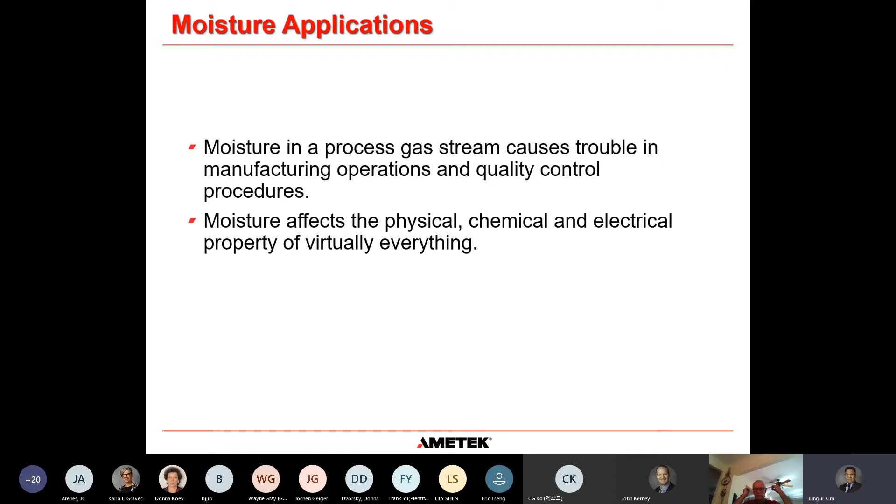Why measure moisture? Moisture in a process gas stream causes trouble in manufacturing operations and quality control procedures. Moisture affects the physical, chemical, and electrical properties of virtually everything. If it goes undetected, moisture can affect product quality and lead to process downtime.

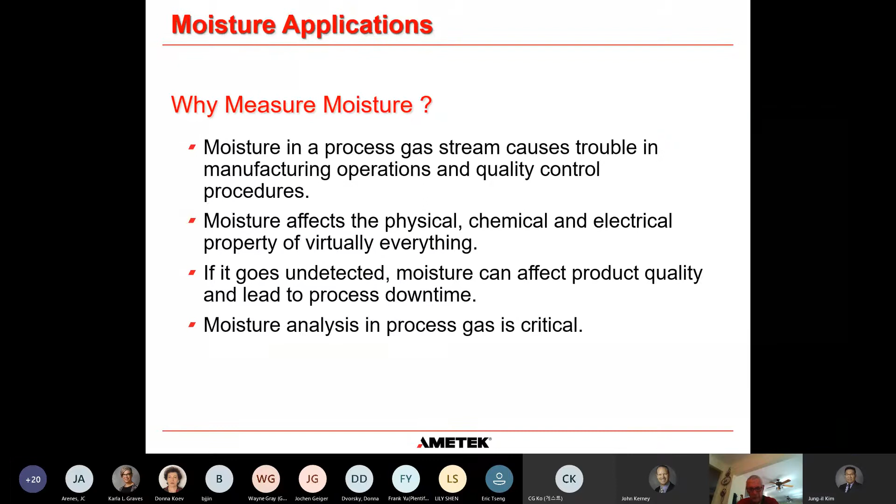Moisture analysis in process gas is critical. Maintaining an optimum level of moisture is critical because it minimizes pipeline equipment corrosion, minimizes line freezing, improves process yields, improves product quality, lowers plant operating costs, and can also slow down catalyst degradation.

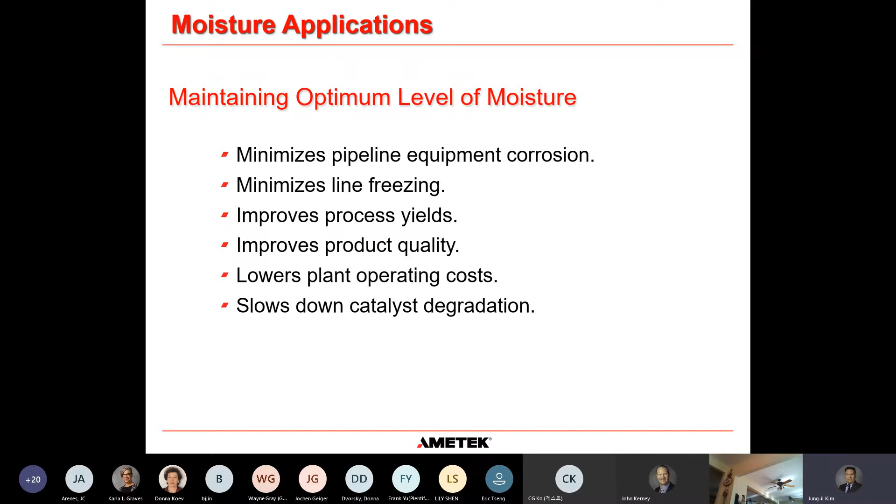I wasn't sure whether I should go over a little bit about the principles of QCM, because a lot of you are very familiar with it. What's the consensus? Joe, I would cover it just since we're recording the session. Might as well cover it.

QCM technology basically measures the frequency of the quartz crystal when we have sample gas, which is wet gas, and dry gas, sample gas that is actually dried by the reference dryer. We have two crystals: the measuring crystal and the reference crystal. Both crystals actually beat at 9 megahertz, and you'll notice that the reference crystal is at 9 megahertz, whereas the measuring crystal is slightly lower.

This is because the measuring crystal is coated with a polymer, a hygroscopic material that absorbs moisture and changes the frequency. So, as I said earlier, the principle is measuring the difference between dry gas and wet gas.

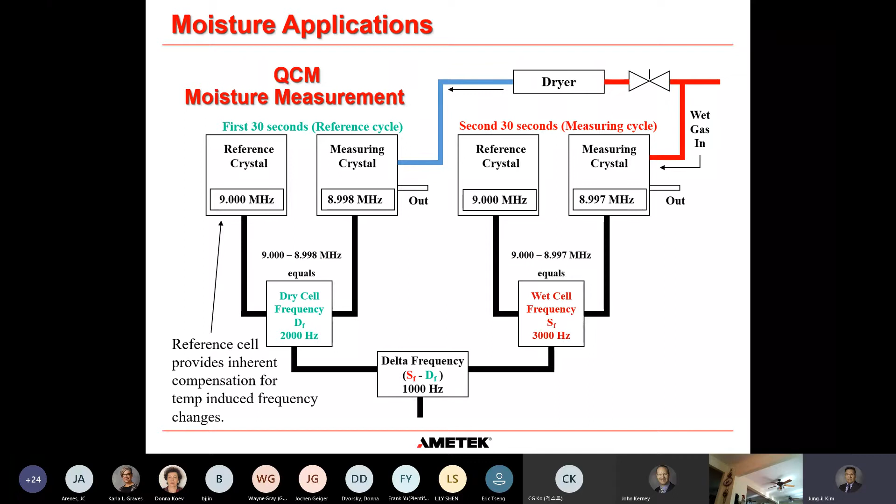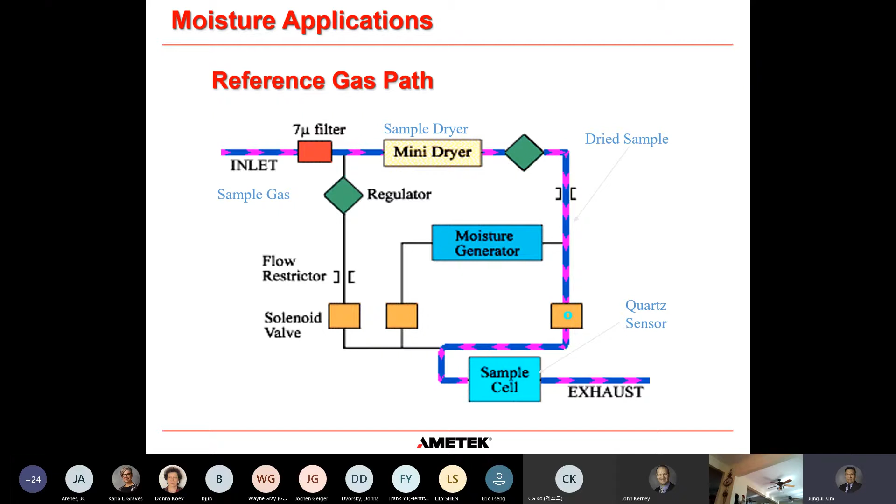The QCM has 3 paths. As I said earlier, the sample path, where the sample gas goes to the sample cell, and the reference gas path, where the reference gas goes through the dryer that gets dried down and goes to the sample cell, where you're measuring the difference between the dry gas and wet gas.

QCM has a 3rd path, which is the moisture generator path, where we have a NIST traceable calibrated moisture generator. When you are running verification on it, you are measuring the wet gas, which is the gas going through the moisture generator, and the dry gas solely going through the dryer only. And that gives you the value of the moisture generator.

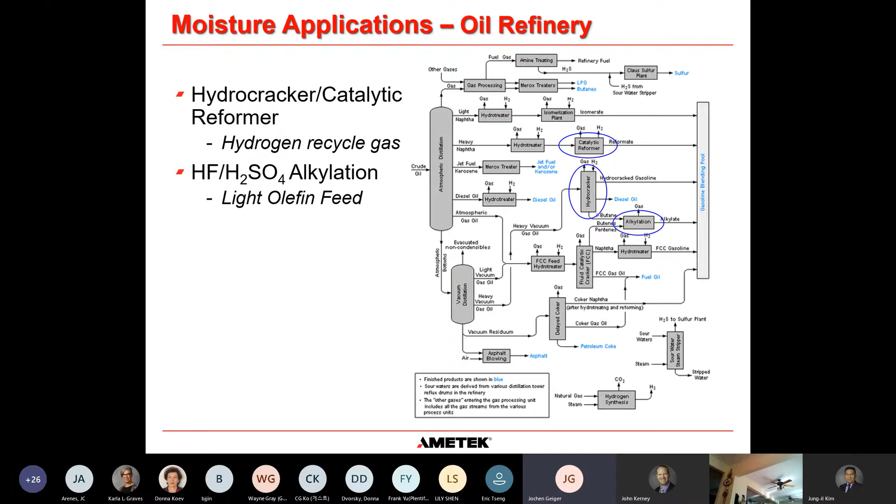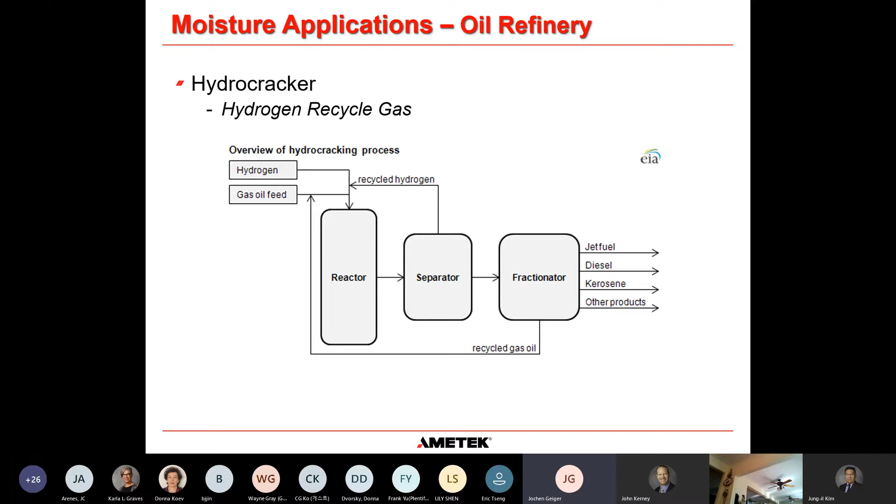Next slide please, Daniel. So the overall description of the application is hydrogen recycle gas. I've not come across a single refinery in my business lifetime which does not have a moisture analyzer for this application. They all have a moisture analyzer for this application.

Go next slide, please. So what is the process doing? The process is increasing the octane number of the product, and hydrogen is a byproduct of that. Hydrogen is used to activate the catalyst and to have the catalyst working, but it's highly critical that there is a known specific moisture concentration in that hydrogen.

Sorry, can you go back to the previous slide, Daniel? What is also happening during the reforming - at one point the reformer needs to be recycled. There are several reformers always in a refinery, and one may be on a recycle. During that recycle of the reformer, there will be products in the gas like HCl, like pure chlorine, some other dirt, which can really potentially damage any kind of instrument installed. Therefore, most people isolate their instrument during the recycle of the catalytic reformer and only get back at the point when the unit becomes active again.

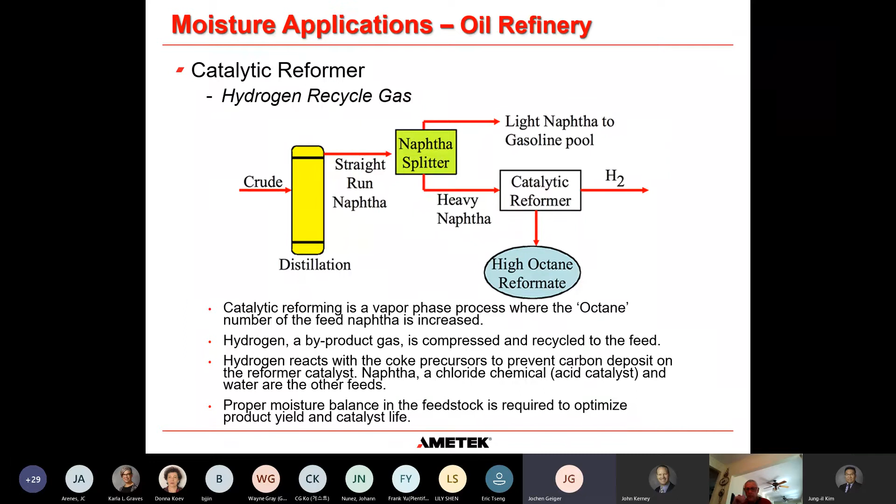So what I'm doing when I'm visiting customers - go next slide please again, Jung-il. For this application, when you see a customer, as I say, there is no refinery without having that measurement installed. I can almost guarantee that. Something they have. The question is, what does the customer have, and how happy is the customer with what he has installed?

For example, if you come across and he is telling you, I have a capacitive sensor from Panametrics, or however they are called now, and I rarely see a good result - bingo, that is ours. We can propose the best possible technology, and that's QCM. And at the end, we will compare the technologies a little bit.

On the other hand, if you meet a customer who is telling you, you know what, I'm changing my sensor every 4 months, I cannot control the process, I'm getting so much HCl - then maybe we have to discuss with the customer a different technology. You always have to keep in mind, we at AMETEK have different technologies available, so we have to use what is best for the customer and what the customer wants to hear.

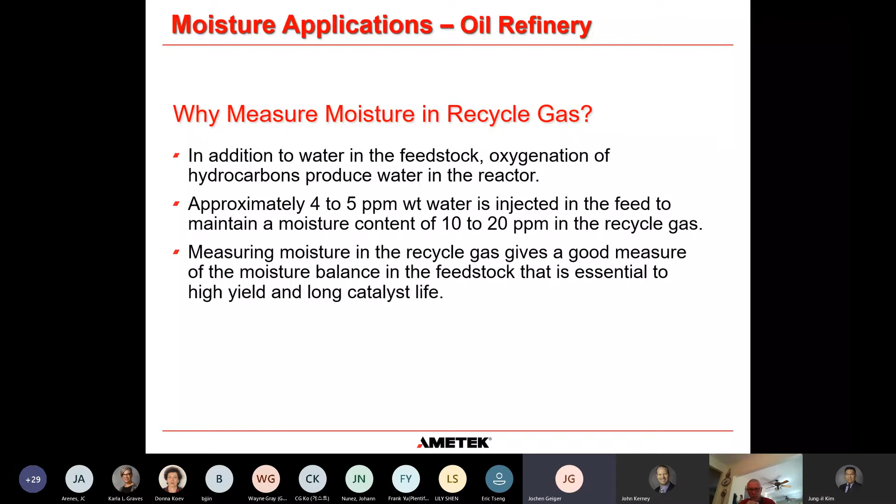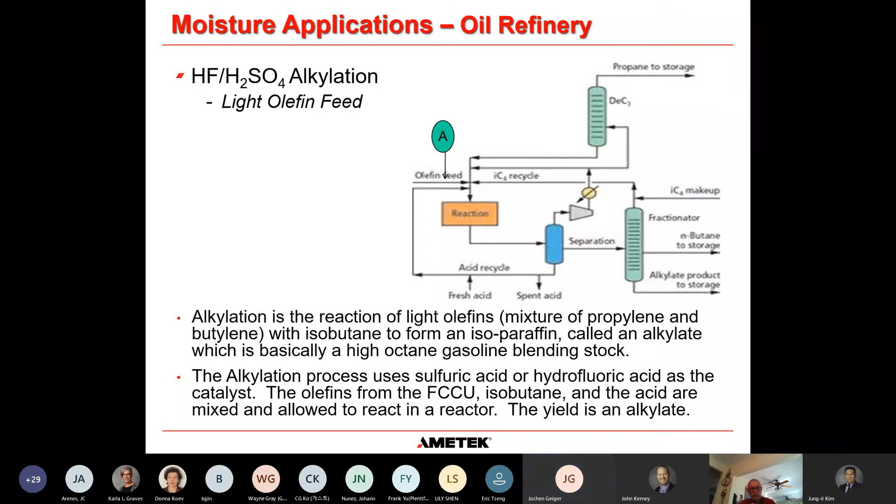Okay, the next big topic in refineries is the alkylation field, the alkylation unit. It's the same question—it's a reactional process using liquids and other substances to have a reaction happening, and moisture is a clear and significant measurement to guarantee process performance.

Next slide. And here it's also a question of protecting the hardware vessel from corrosion, because if the feed is too wet, corrosion of the process units will start. So we have to bring it to the optimum consumption of acid, and lowering the cooling cost.

But again, here I cannot provide any reliable figures of how many dollars we can save by bringing that principle in. And the same point applies—the application needs a reliable measurement. The best and always the point which makes a measurement reliable is that I can guarantee the accuracy of the reading.

Always, when you talk to people in the refinery, you come across that classical battle between instrumentation and process people. Process people always say that reading cannot be true. Instrumentation says, hey listen, my instrument is always okay, the reading is true. How to prove it? With the QCM technology, you have online verification where you have a certificate against which you can say, see, I show you my instrument is right. How do you do it with other principles? That's a big question mark—how do you want to prove your reading is correct when you don't have a moisture generator on board?

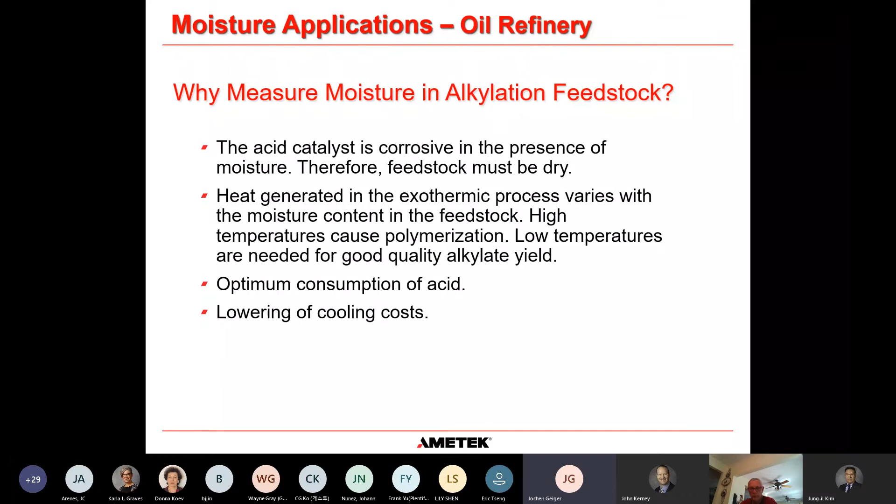Any more questions on that topic before I go to the next one? I see none. So the next one is moisture in petrochemical.

As I understand, we will have a separate session about the petrochemical unit, about the ethylene cracker. But let's concentrate here on moisture. Can you take the next slide? We want to concentrate on moisture applications today, even though I'll mention some other applications happening here.

For petrochemical, moisture is critical for manufacturing, for storage, for distribution. It's also critical for process performance, for the quality of the product, and for protecting the hardware and equipment of the process. So there are several aspects of why moisture is so important in petrochemical applications.

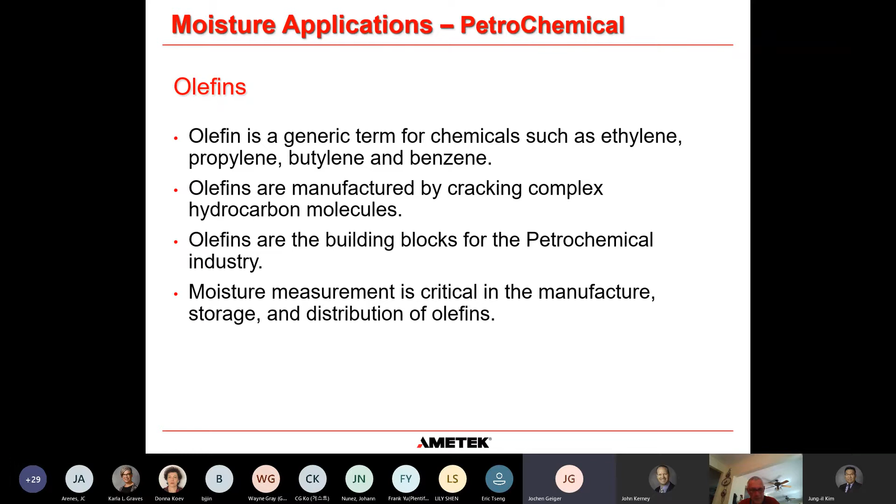One of the biggest applications there is the ethane cracker. Next slide please, Jung-il. For the ethane cracker, as I said, we will have a separate session, but it's the most attractive process unit we can go for. You have a moisture analyzer, you have an ethylene analyzer, and you have an oxygen analyzer for the cracking furnace. So there's a lot of applications AMETEK Process Instruments can address.

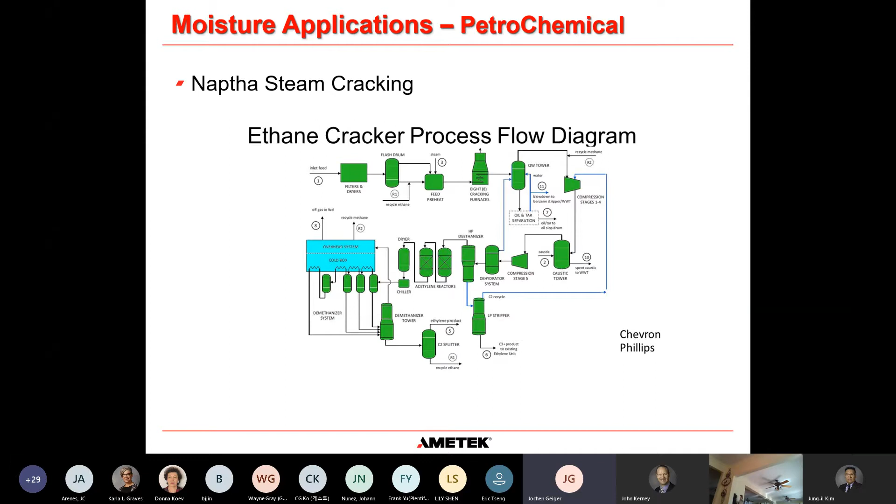But as I said, we are concentrating today on moisture applications. Go to the next slide please. So we have the feed gas pipelines, we have ethylene, propylene, ethane. The moisture level has to be guaranteed during various process steps.

There might also be a custody transfer point where the producer is selling his product to somebody. It can go on a rail car, on a street car, different ways, it can go into a pipeline. So at one point, the manufacturer has to guarantee the quality of his product, and therefore moisture is a highly important quality measurement.

And the moisture concentration there is low, definitely in an area below 5 ppm. When we talk about such low measurements, it becomes more critical, and I'm ready to make the statement: I don't know any other reliable process instrument working on a different principle than QCM that can make that measurement reliably and accurately. The higher point is on reliability, making sure the instrument is reading what we want to see.

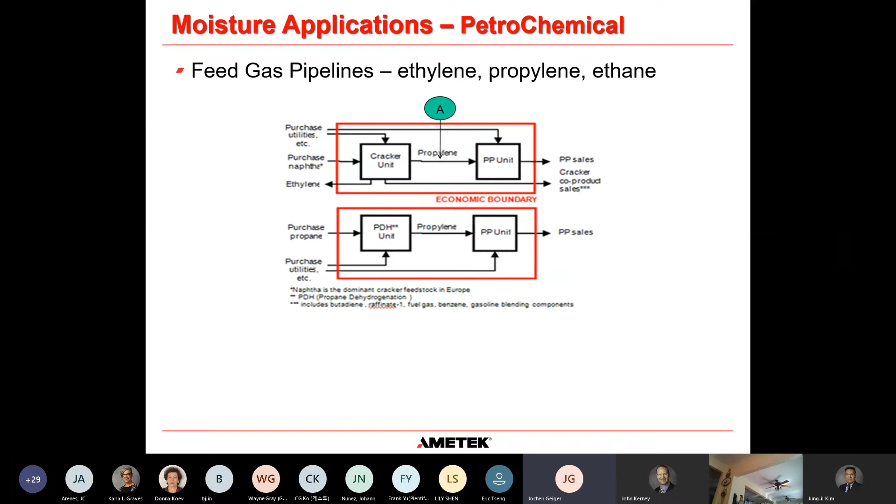Go to the next slide. There are also catalytic beds where we have to make sure the hardware is protected from potential freezing on the cold box. Next slide please.

As I've said, we have to maintain a moisture concentration here which is approximately below 5 ppm, in most cases around 1 ppm. So you need an instrument capable of doing that. And in my view, only QCM is capable of doing it, plus QCM plus the moisture generator is the right setup to make sure the reading of the instrument is not a debatable thing between instrumentation and process control, or customer and consumer.

We also have to understand that a lot of people will stretch their specification. As I've said, if you have only one instrument to sell, of course as a salesperson you try to make it look as good as possible. So you will compromise, you will stretch the numbers.

Our strong point is, again, we have online verification. Plus we have to understand that only the AMETEK QCM instrument has a baseline, a zero line compensation, as we use in our models SLR and TE. Other manufacturers do not have that feature.

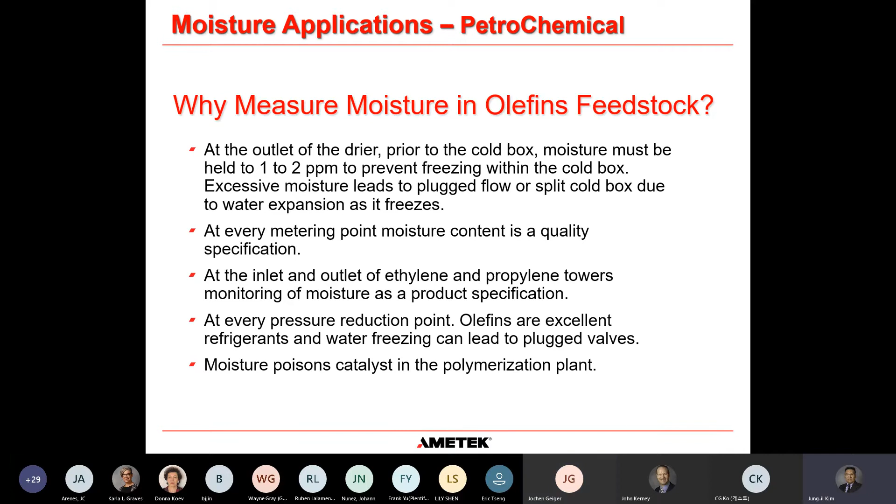One other application that came up and has become a disaster is the recycle stream on this polymerization reactor. They need the QCM because of the low-level moisture, but the presence of titanium chloride in low amounts in the recycled stream is detrimental to any analyzer. So that is one application we have to stay away from.

Thanks, Daniel. I saw some communication, but to be honest, I've not come across that much with it, good or bad. The good ones are the ethylene, propylene, loading, manufacturing, cold box - all these applications, low level, and performance is critical.

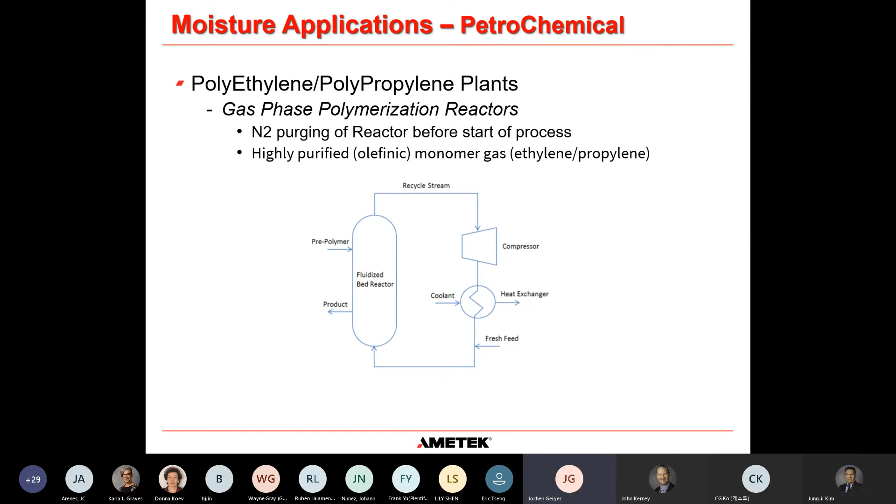Okay, let's come to natural gas. Natural gas is getting more and more important, and transport of natural gas is also critical. What you don't want under any circumstances is moisture in your natural gas pipeline, because it can cause pipeline corrosion, it can cause freezing in the pipelines, it can cause hydrate forming in the pipeline. So all the stuff you don't want to happen. It can damage compressor stations, and it can finally also damage the pipeline, and it can cause freezing.

There are areas in the world where the dew point of natural gas in the pipeline - when we go to the south, for example in tropical regions, they don't come across pipelines operating at minus 30 degrees C. But I'm sure in Canada, in parts of Asia, in Russia, this is an issue. So it's a little thing to check which geographical area we're talking about, and that's dictating the performance or the specifications for the pipeline.

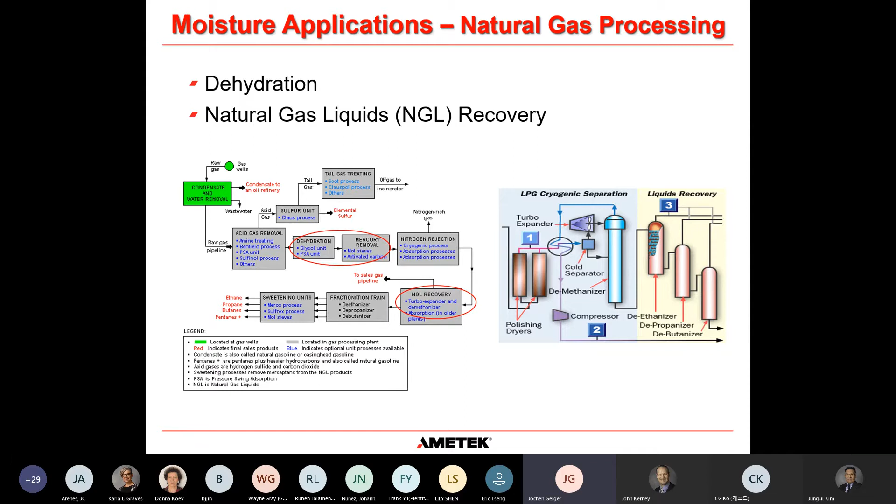That's the mole sieve dryer or the TEG dryer, and simply they are there to dry the gas. Wherever it comes from - it can come from underground storage, it can come from the field - the gas has to be dried and has to meet the given specification. It has to go into the pipeline grid. And when we talk about natural gas pipelines, it's always interesting to see what is required by the operators of the pipeline network - is there a common overall specification written for that? Again, that's different by geographical area.

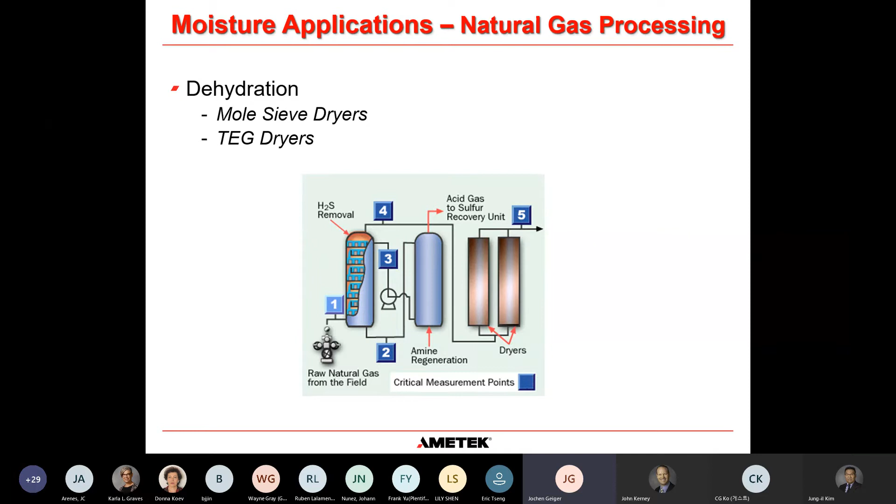So we have the dehydration, we have the mole sieve dryers where moisture measurement is a must. Then we have the natural gas liquids where we have a turbo expander - next slide please - where the gas has to be ultra dry before it hits the turbo expander, which has a surface temperature of minus 110, minus 120 degrees C. That's where the other gases get split off. Moisture measurement for that is ultra critical, ultra important, because when the turbo expander freezes, it cannot operate, it cannot produce, so it causes process downtime, and it's ultra critical.

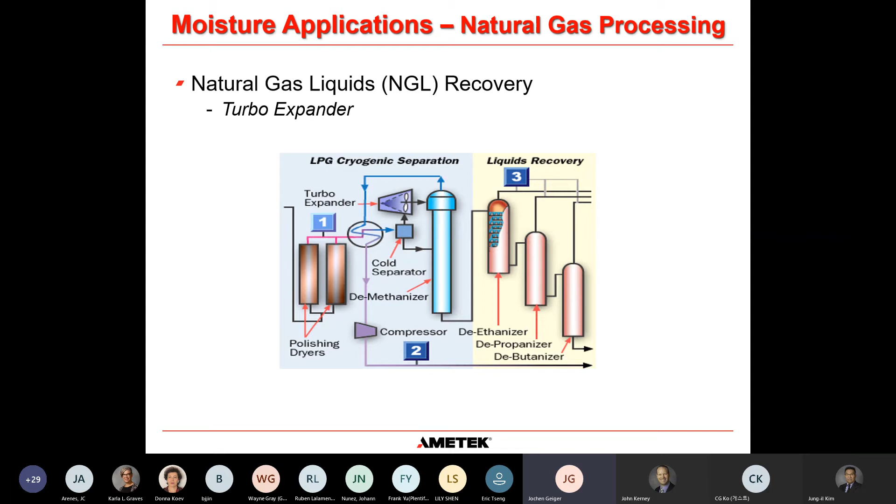And this is ultra low - the measurement will be for sure below 1 ppm. And again, you need the QCM technology and you need the correction for that. Okay, next slide please.

In summary about natural gas pipelines, we have pipeline transmission, we have custody transfer points, we have compressor stations, we have storage. And when we go into storage, storage can be different - storage can be in storage tanks, storage is mostly in underground storage. In some areas, the reservoirs where they store natural gas have been used for oil before. It may be salt domes where they win the salt when they wash the salt out from underground. So it's highly potential that the moisture may increase, that the moisture reading is high, that the gas has to be dried. And for all of that, the measurement of moisture in the natural gas is a critical component. And we're coming more and more across bio ethane injection into the gas.

In a lot of areas in the world, 10 to 20% of natural gas, of any energy, needs to come from renewable sources like bioethanol, from grain, from corn, from farm sources, whatever. And this gas also potentially is wet, and it has to fulfill the pipeline specification before it goes into the pipeline grid. So every small producer of bioethanol, of biogas, has to fulfill the quality specs of the gas before it's injected. So there is a wide market, a big market for additional measurements, because before you get 10 or 20% of your entire natural gas replaced by renewable energies, you need a lot of small stations. So you find this on farms, you find that on many things.

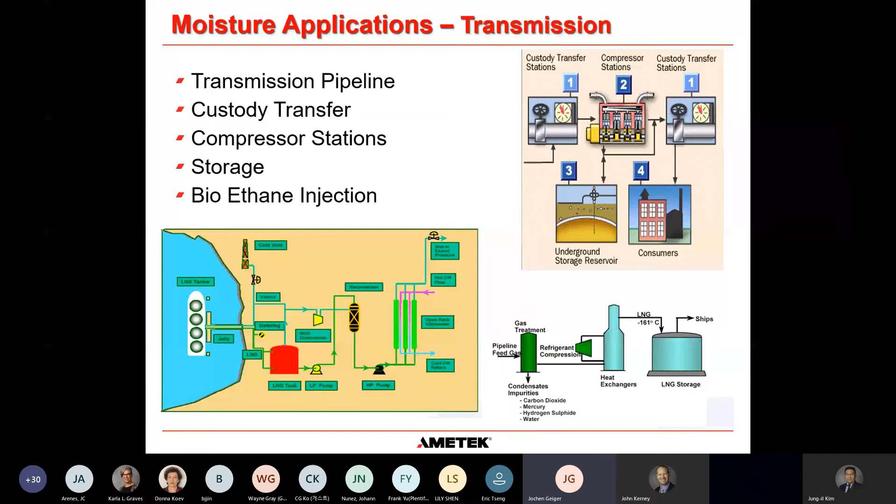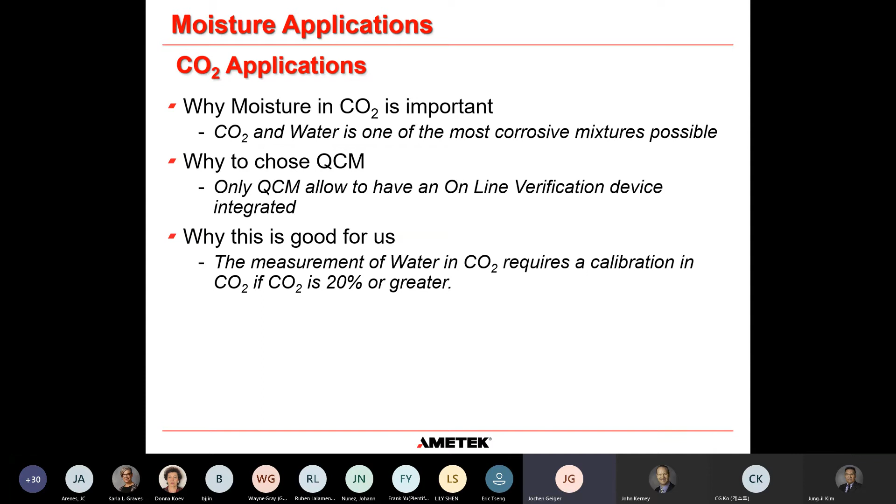One gas which I want to pay some special attention to is moisture in CO2. There's not many, or I would say it's almost the most corrosive mixture you can build, water and CO2. Why is CO2 so important? CO2 is widely used in the industry. For example, all the drinking industry is using a lot of CO2. Also, we have to consider that CO2 needs a special treatment of the QCM sensor, and it looks like other manufacturers of QCM sensors don't understand how to do that. So if you convince a customer that QCM is the best technology for that, then you are exclusively, and you are alone on that playground. So CO2 producers and CO2 consumers and everybody who is applying CO2 to the food industry is a potential client.

I was mentioning it several times. Of course, you can do some of the applications I just described with capacitive probes, you can do it with quartz crystal sensors, and you can do it with laser. A lot of people think the latest innovation of the globe is laser. Is it always the best? Don't know, not necessarily.

What do we have to consider as AMETEK? If a customer is not happy for whatever reason with his installed instrument, I would not go and offer him the same instrument again, whatever it is. There's some applications like the reform or recycle gas, which is critical, which is dirty, and there can be process conditions where the quartz crystal sensor gets contaminated frequently. Yeah, then let's go for the laser.

But what does it mean when I say then let's go for the laser? I always say if I open an application for laser, I invite 5 to 6 other companies. Laser almost is laser - everybody has its specifics, but laser is laser. If I succeed in keeping an application for QCM, then it's us or Michell, only 2 manufacturers offering the QCM technology.

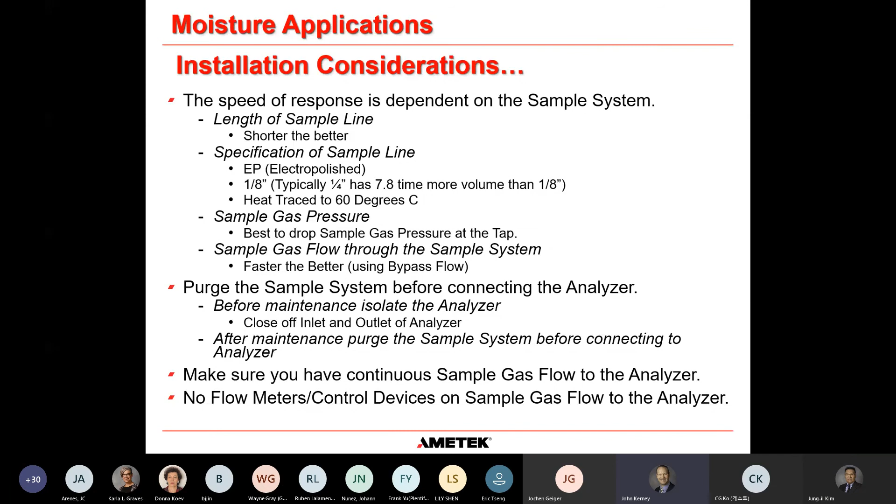Thanks, Daniel, and thanks, Jochen. I'll give a chance in case anybody has any questions, but I'll ask one to start. On the slide before that, I know you guys mentioned a few advantages on what AMETEK's QCM can do. I was just wondering if either of you could comment, for the audience, on some of the better points to make when you're going up against Michell as the other QCM manufacturer. What are some of the key areas you typically want to highlight?

Michell has not found the recipe of how to do moisture in CO2. And Michell has not found out, or doesn't want to do it, whatever. They don't have the zero dryer module, so they cannot compensate the zero drift of the system.

In addition to that, the equivalent to Michell's QCM model is our 3050 OLV. They cannot do better than our 3050 OLV. Even with the 3050 OLV, we have a better dynamic range, which is 0 to 2500, whereas theirs is at best 0 to 2000, but they also have a calibrated range which is, I think, 0 to 1000-something, so their range is not as good as ours. The detection limit they claim is the same as ours for the OLV.